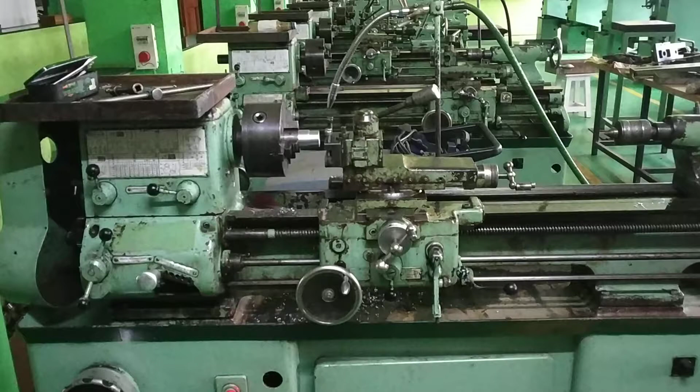So in this practical we are going to have the introduction of the lathe machine first, and then simple operations we will perform on the lathe machine. Now first we'll see the introduction of the lathe machine.

On the left side of the lathe machine we have the headstock. On the right side we have the tailstock. In between the headstock and tailstock, this is the carriage. This part is carriage, and all these are supported on the bed. So this is the bed of the lathe machine.

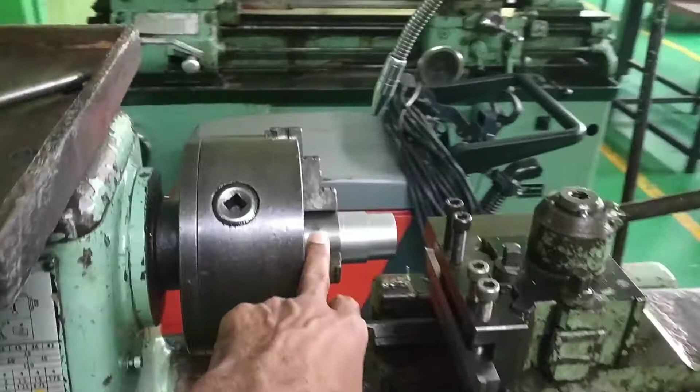Now what is the function of headstock? Headstock will have the drive mechanism for the spindle. So this chuck is mounted on the spindle, and workpiece is held with the help of the chuck. Now this is the 3-jaw chuck, and we are going to hold the symmetric workpiece with the 3-jaw chuck. We can mount the 4-jaw chuck also for holding the asymmetric workpiece.

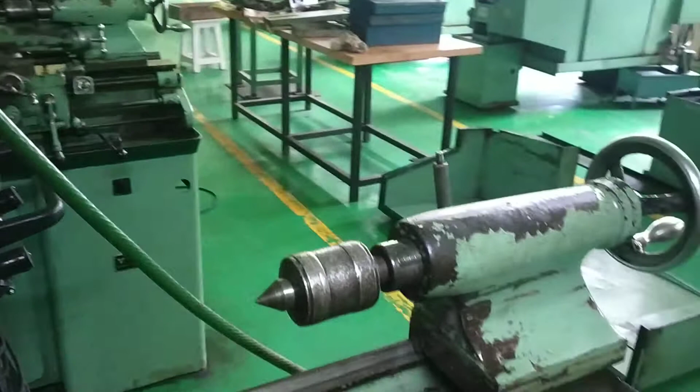Now tailstock is used for supporting the workpiece from another side. When the length of workpiece is large, we can support the workpiece with the help of tailstock. Also, we can perform some operations like drilling, reaming. So these operations can be performed by replacing this dead center with the drilling tool or the reaming tool. So that is the function of the tailstock.

Now carriage is moving on the bed. You can see carriage is moving in two directions. One direction is parallel to the axis of lathe machine, and another direction. So you can see we have the two hand wheels. With the help of this hand wheel, you can see the carriage is moving parallel to the axis of lathe machine, and it is moving on these outer guideways.

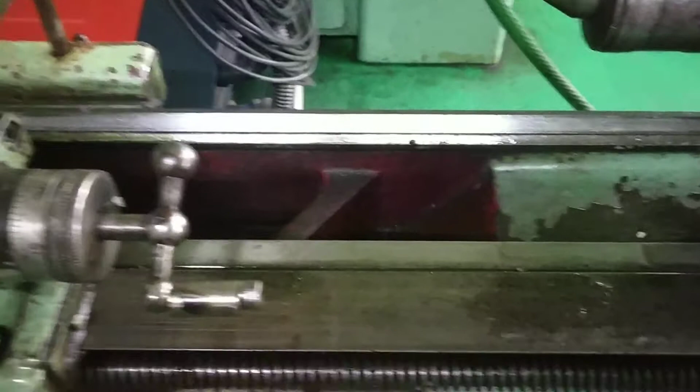So we have the two guideways, outer guideways and inner guideways. On the inner guideways, your tailstock is moving forward and backward to adjust the length of the workpiece. On the outer guideways, your carriage is moving. So parallel to the axis of the lathe machine, your carriage is moving with the help of this hand wheel, and with this hand wheel we can move the carriage perpendicular to the axis of lathe machine. So it is called cross motion.

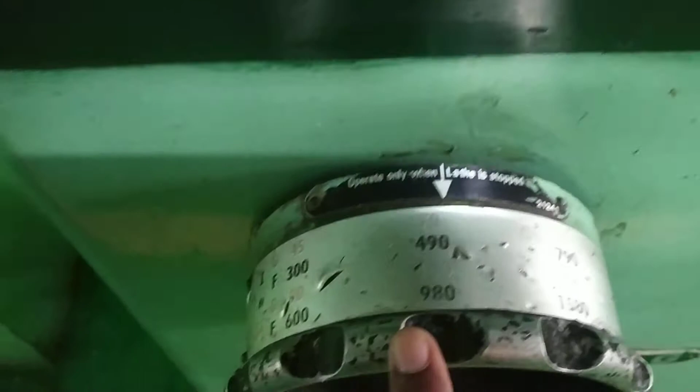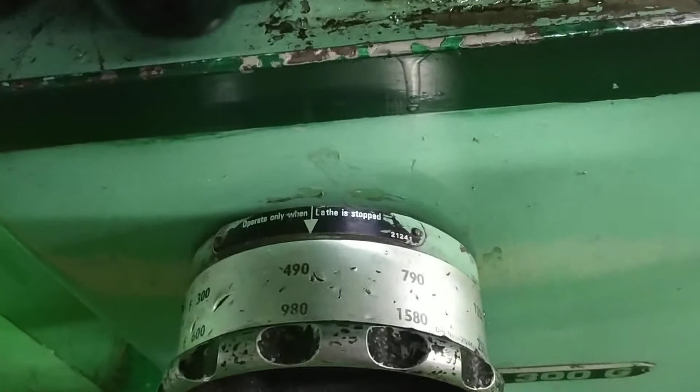Now let's see the different controls for the lathe machine. With this control we can adjust the RPM of the lathe machine. We can set the RPM as per this control. So we can have the RPM ranging from minimum 45 to maximum 2000 RPM, and we can select the RPM as per the requirement. This RPM will be adjusted in the gearbox. So we have the different sets of gearbox here, and we can select the RPM as per our requirement or as per the machining condition.

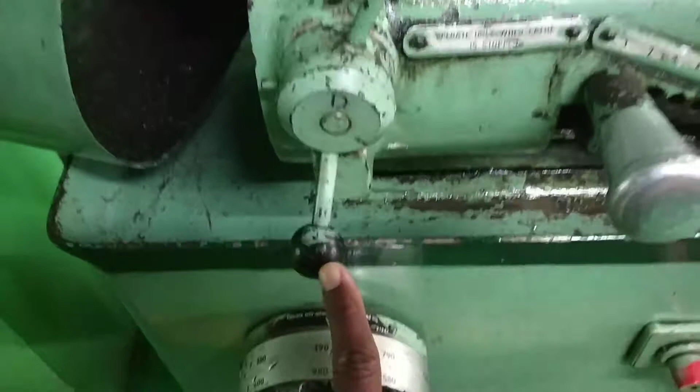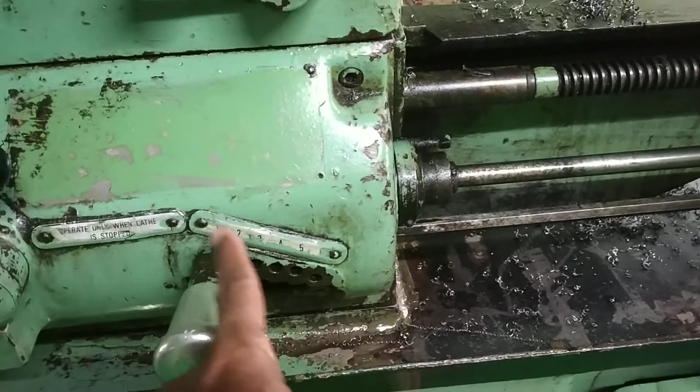So this is the lever with the help of which we can select the RPM for our machine, and we can set the feed also. So this is the lever. We can engage the lever in respective slot 1, 2, 3, 4, 5 to set the automatic feed, and this is the feed chart. Now in our case we are not going to use the automatic feed, we are going to use the manual feed only.

This one is the lead screw of the lathe machine, and this one is the feed rod of the lathe machine. With the help of this we can give the automatic feed to the carriage, and this is used to start and stop the machine. If you turn it downward, it will start the machine, or if you turn it upward, it will stop the machine. We'll have the clockwise and anti-clockwise motion. For downward it will rotate clockwise, or it will rotate in anti-clockwise direction like this.

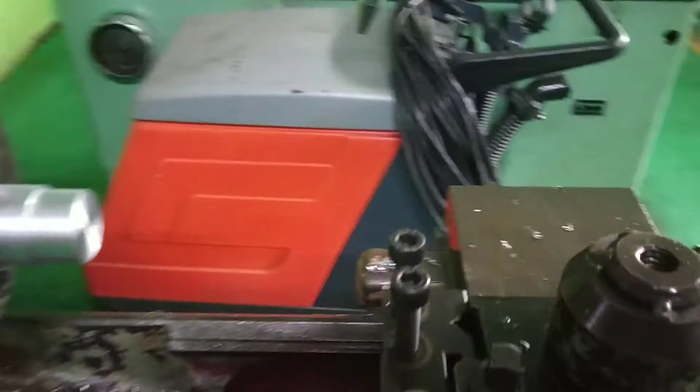Now let's have a simple operation on the lathe machine. This is the job which is mounted on the lathe machine, and with the help of this tool we are going to have the facing operation first and then the turning operation. For facing operation, the tool is moved to the center of the workpiece, and it is given some depth of cut. It is moved into the workpiece, and then the tool is moved perpendicular to the axis. You can see the cross feed. We are moving this hand wheel now, and with the help of this we are doing the facing operation.

So what is facing operation? Tool is given the feed perpendicular to the axis, and the length of workpiece is reduced in the facing operation. You can see there is a contact between tool and workpiece, and the material is removed.

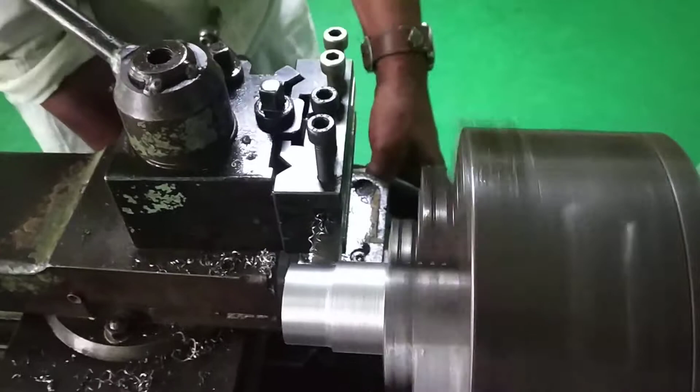Okay, now we will perform the taper turning operation. We have seen the facing operation and turning operation. Now for taper turning operation, for this job, we will have the taper. Okay, how to perform the taper turning operation? Before that, we have to find the angle of taper. Now let's see the calculation for the angle of taper first.

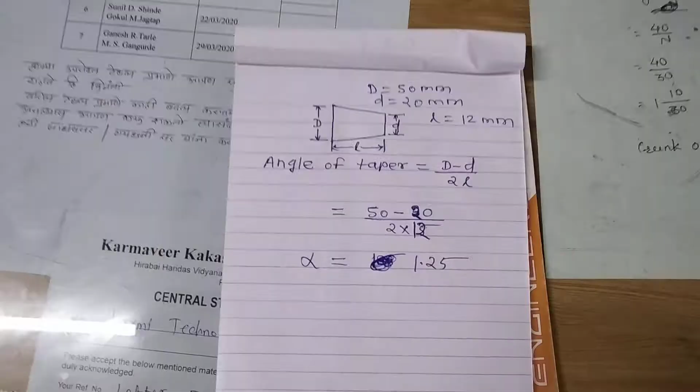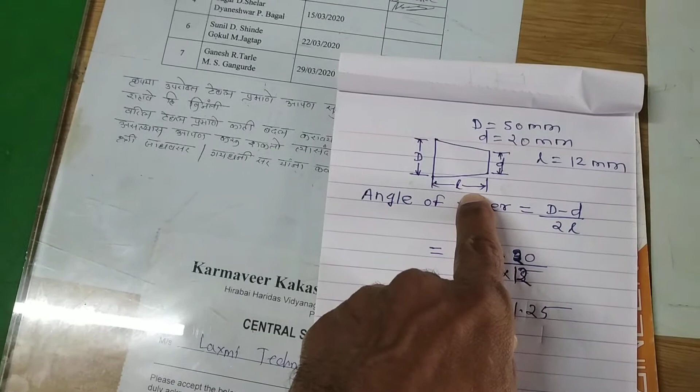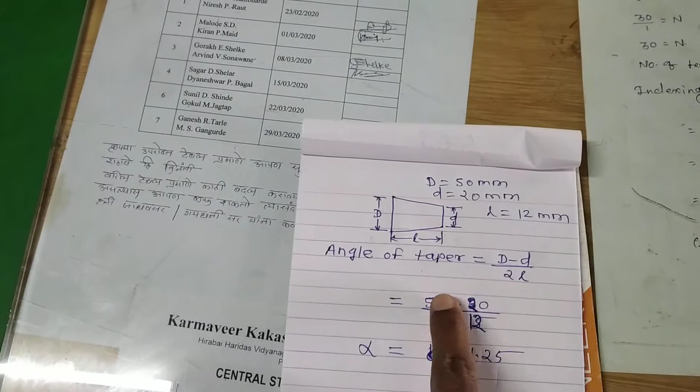You can see here how to calculate the angle of taper. So capital D is your large diameter, small d is the smaller diameter of the taper, and L is the length of the taper. Let's consider capital D as 50 mm, small d as 20 mm, and length of taper as 12 mm. So we can calculate the angle of taper as D minus d upon twice L. Okay, so 50 minus 20 upon 2 by 12. So this alpha, that is the angle of taper, will be equal to 1.25.

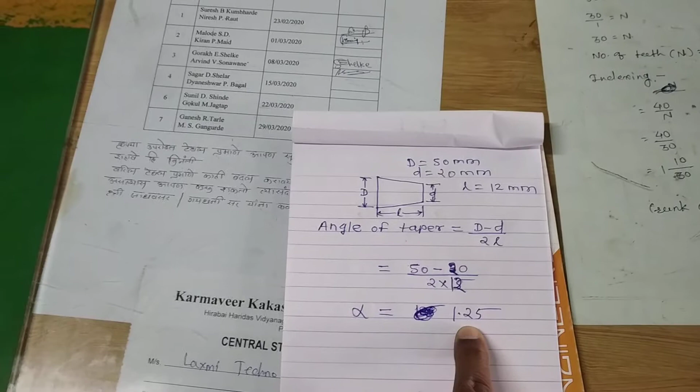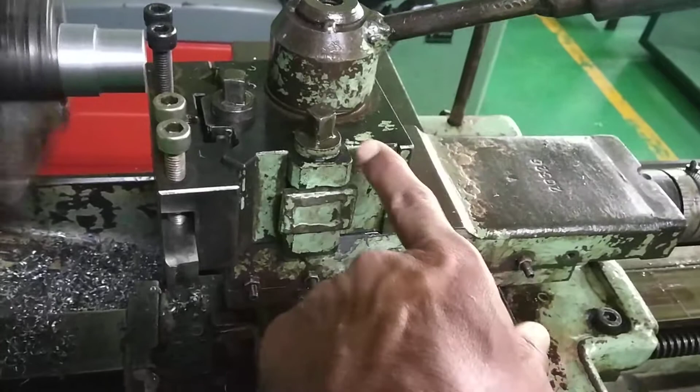Now this alpha angle we have to set on the lathe machine to generate the taper on the workpiece. Now this angle alpha is set here with the compound rest. You can see this is the tool post. So this tool post is swiveled to the required angle. By loosening this bolt, we can swivel this tool post to the required degree. Now angle set here is 1.25 degree. So angle is already set. Now we'll see how the taper is turned on the lathe machine.

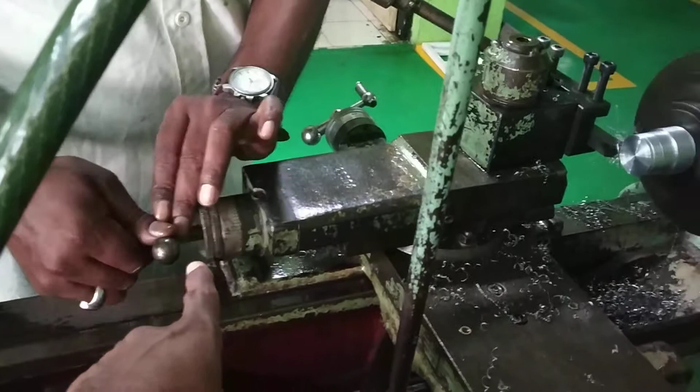Now this hand wheel is used for angular feed. So we have three hand wheels. One is for longitudinal feed, another is for cross feed, and this third one is for angular feed. You can see now angle is set and we are giving the feed in angular way. Now we are generating the taper here. Every time you have to set the depth of cut. You can see now you are moving the tool with the help of this angular feed to generate the taper.

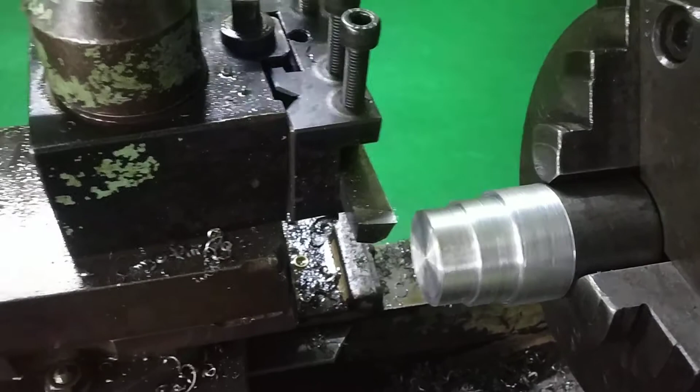So you can see here on the job, this is your small diameter of the taper and this one is the large diameter of the taper. So here you have generated the small taper on the workpiece. So this is how we can have the taper turning operation, the facing operation and the turning operation on the lathe machine. Now let's see some of the jobs which are completed on the lathe machine, and with the help of this job we can have the idea.

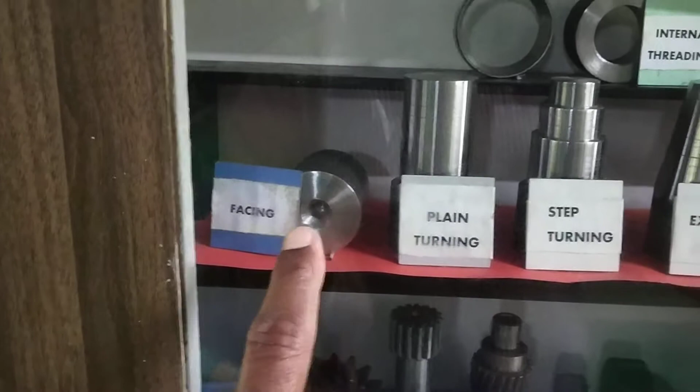Now let's see some of the jobs which are completed here on the lathe machine. This is the example of the facing operation and the center drilling operation. Center drilling operation is done with the help of the tailstock. Center drill is mounted in the tailstock center and you can perform the center drilling operation. So what is facing here? It is the operation performed perpendicular to the axis like this. That is reduction in the length.

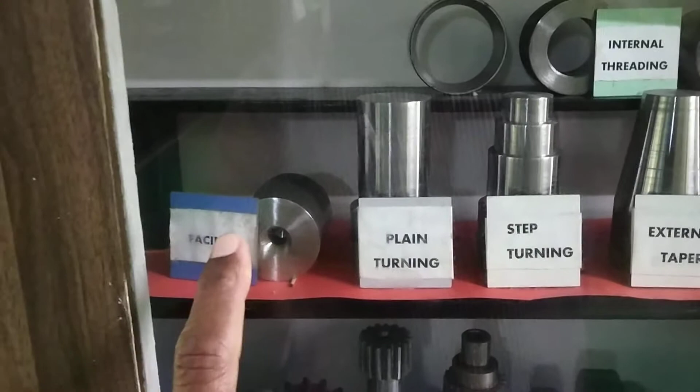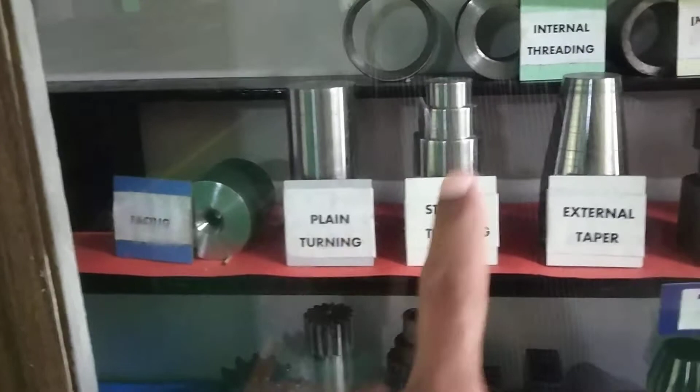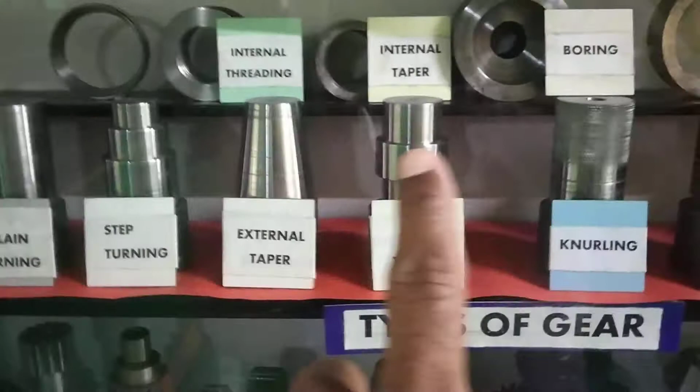Now turning. What is turning operation? Reduction in the diameter by giving the feed parallel to the axis of lathe machine. That is a plain turning operation. Step turning, you can see we can produce the different steps like this. First diameter, second diameter, third diameter, so that is called a step turning operation. So this is taper. You can see here the clear taper. Smaller diameter is here, the larger diameter is here. So this is an external taper turning.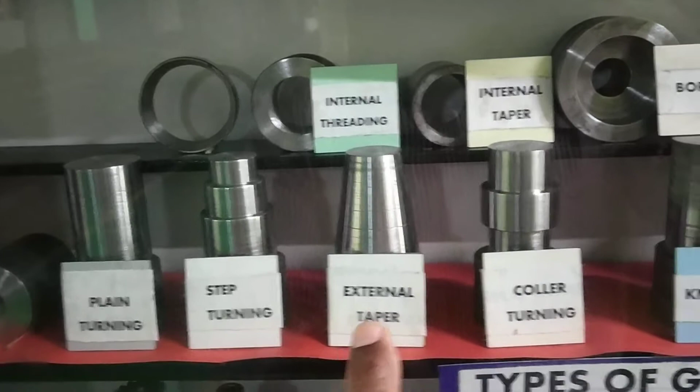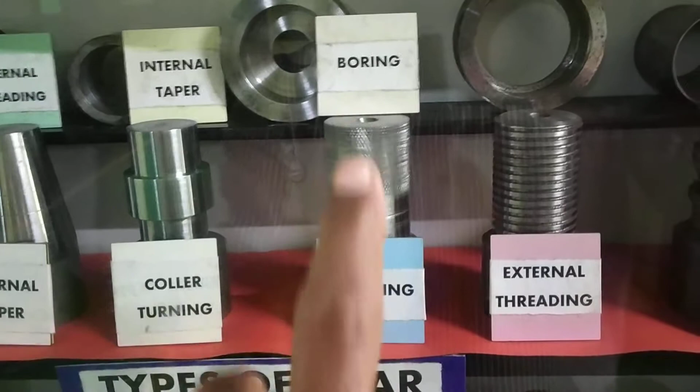Then collar turning. We have the collar in the center, so that is called collar turning. Then knurling. We can perform the knurling operation also on the lathe machine. What is knurling operation? It is the diamond shaped pattern on the workpiece which is used to hold or grip the workpiece. It is performed with a special tool called a knurling tool. You can see the external thread cutting can also be done. The grooving can also be done. So we can perform a wide variety of applications on the lathe machine.

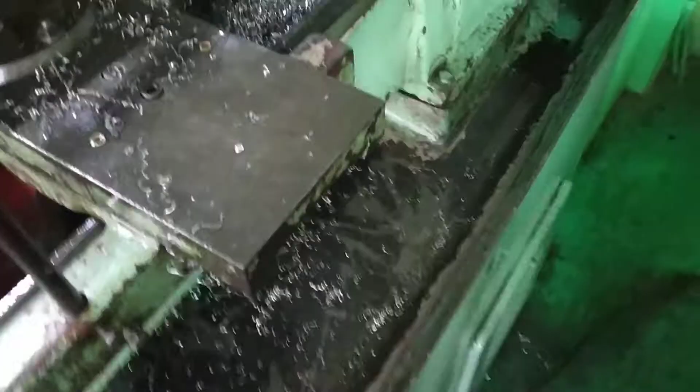We can see here this is the knurling tool. You have to mount this knurling tool in the tool post, and we have the rollers. We can see the two rollers are there. This roller will be rotated against the workpiece, and it will generate the diamond shape pattern on the workpiece, just as we have seen a moment before in the example.

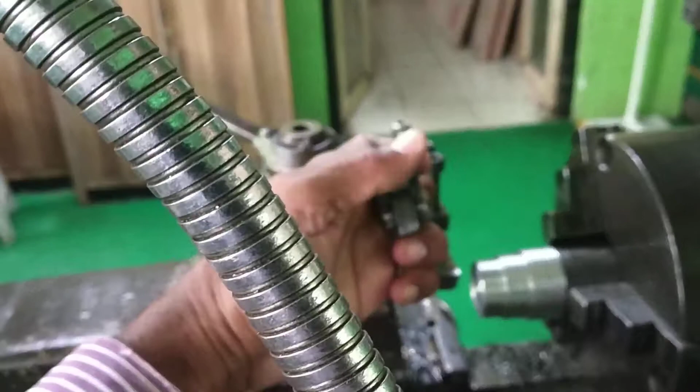So this tool will be held in the tool post like this, and the two rollers will be rotated, and whatever is the shape on the roller will be generated on the workpiece. So this is called a knurling operation. What is the purpose of knurling operation? To get the grip on the workpiece and to get a good look on the workpiece. That is a knurling operation.

So today we have seen the basic introduction of the lathe machine and some of the important operations to be performed on the lathe machine. This is the first practical you are having, and when you actually work on or handle the lathe machine, you will come to know how to do the operations on it. This is a very common machine you will see in the workshop for machining of the jobs.